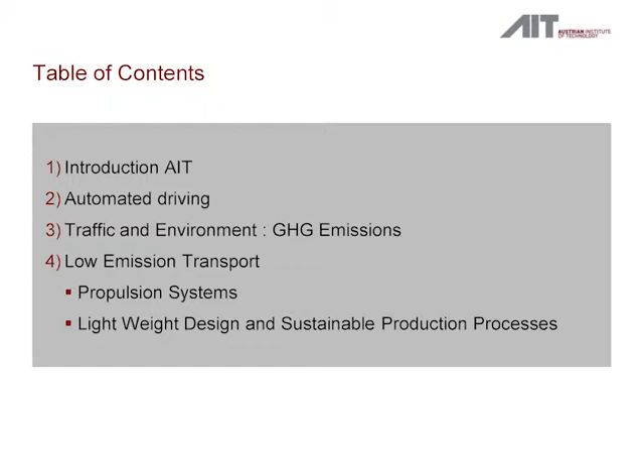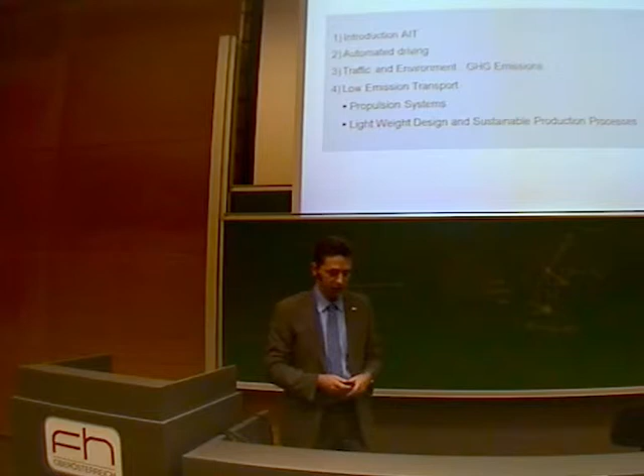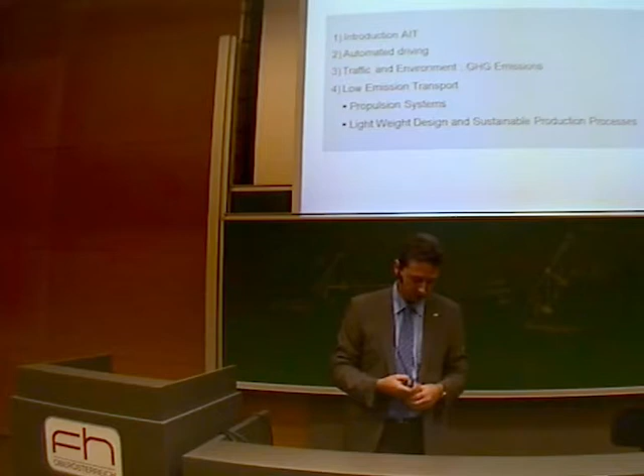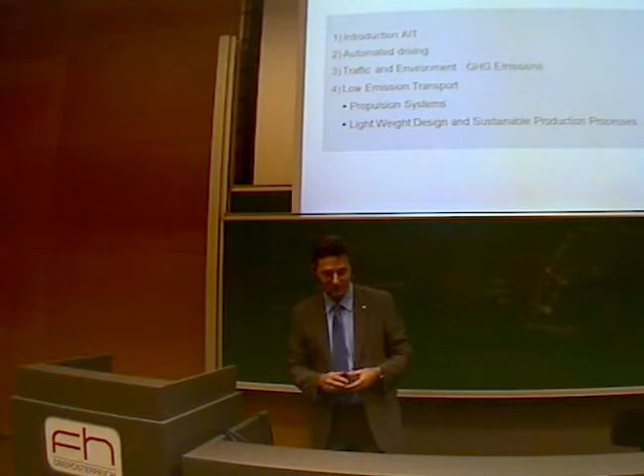A short introduction about myself, so you have an idea why I'm standing here, which was almost given already. Then we will have a short look on autonomous or automated driving, a short look on greenhouse gas emissions, and then on low emission transport systems, especially propulsion systems, lightweight design, and sustainable process and production processes. I hope I can keep this line and make it in time.

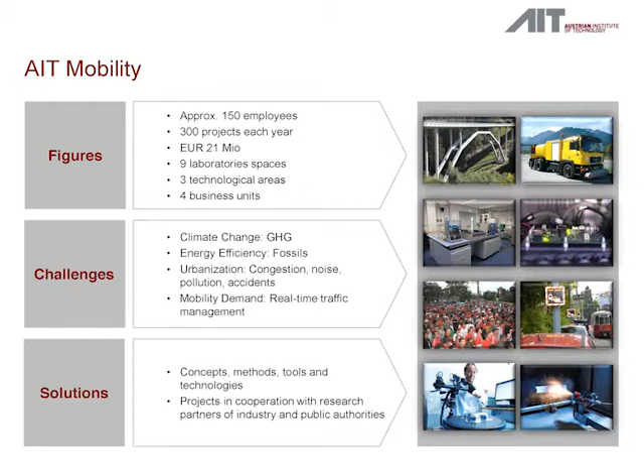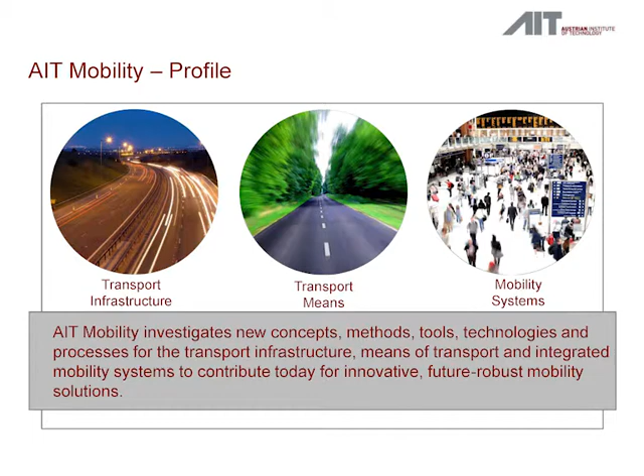Well, I have been introduced already. Austrian Institute of Technology is the biggest non-university research institute of Austria, and on our special agenda we have topics of infrastructure research. We have an energy research department, a mobility research department, health and environment, safety, security, and innovation systems. There is a department of mobility which I'm heading.

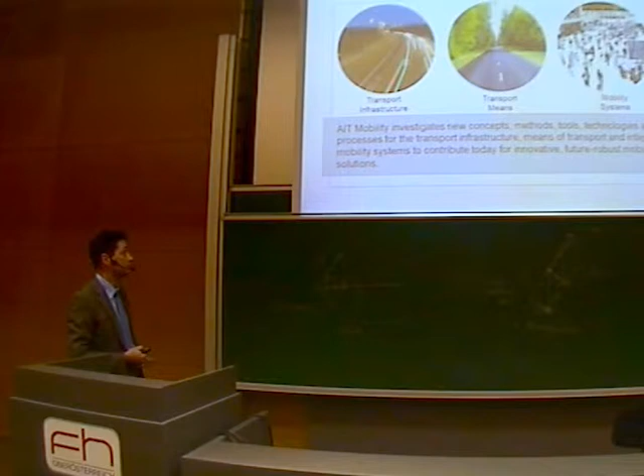If we look at the major research topics actually seen in transport techniques, we have the transportation infrastructure—road, rail infrastructure, bridges, and so on. We consider the innovations and research in the transport means, our vehicles that move us from A to B, and we consider research and innovations on mobility systems, management systems, transport logistics systems, and so on. These are the major topics we are covering in our research.

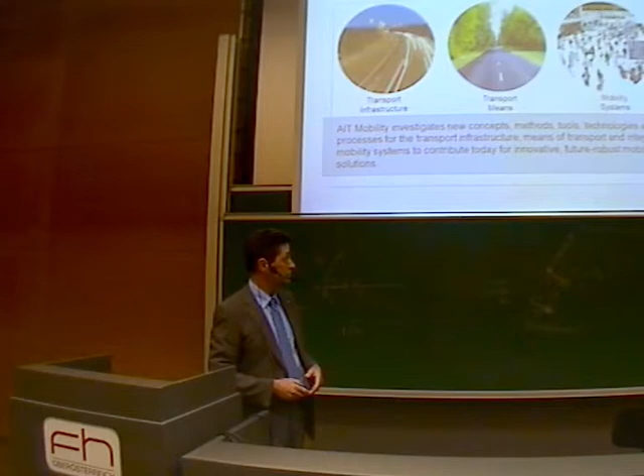To give you an idea, there are these very popular topics which are automated driving, electric cars, and lightweight design, but there's quite a lot more research on transportation, and the major peaks are according to this. These are research peaks. We used here 40,000 publications, looking for the topics in scientific reviewed journals.

On the infrastructure side, you do have emissions, noise emission, gas emissions as a huge peak in the landscape. But already for infrastructure, you have ad hoc networks, so a lot to do with automated driving in future—one of the major issues in research of infrastructure topics.

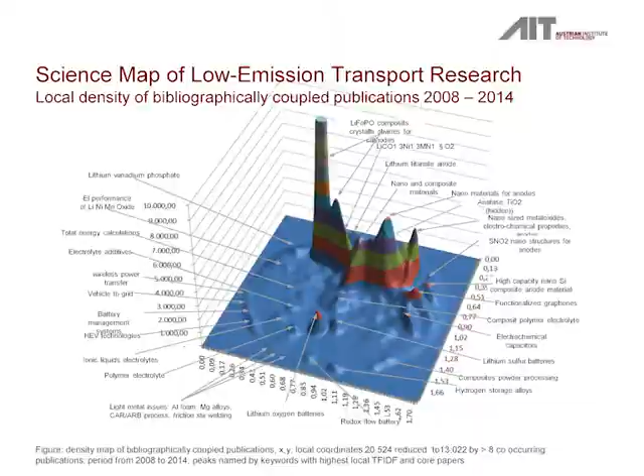If you look at the scientific journals from the point of view of our vehicles, low emission transport vehicles, you have a very strange picture. Again here 20,000 publications covered. What is the topic here? It's electromobility, and it's battery technology, almost only from this plot. You can see different types of batteries where the research is going on.

If you look at something like I mentioned before, a big topic—lightweight materials and lightweight construction—you will find it over there in these areas, very tiny plots against the volume that is published. This was published from 2008 to 2014, in battery techniques and electric vehicle techniques. So from a research point of view, quite a huge amount on electric driving.

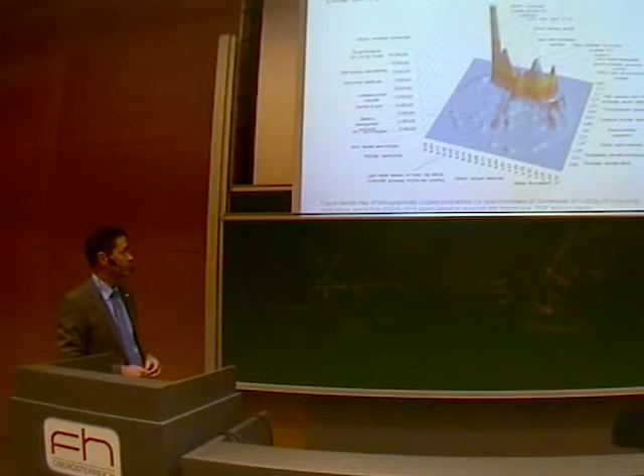Might be that this should be the only slide I should give for automated driving. This is not driving—this is a picture from Austrian Airlines. But if driving could be like this, yeah, I think we all would appreciate. So it will come. It will be.

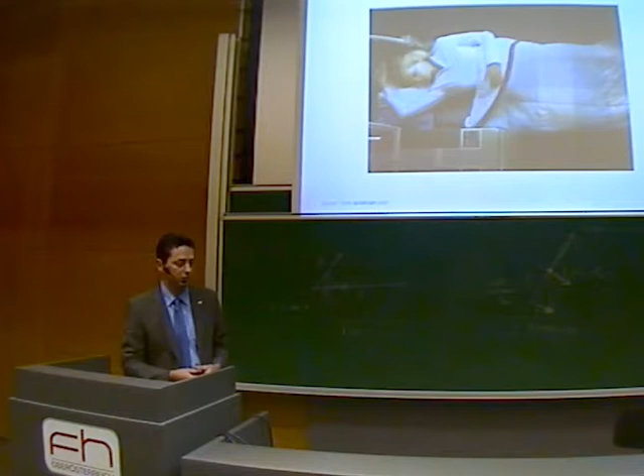Usually I don't like to talk about the future, because you can have a lot of foresight processes to generate scenarios, but none of the scenarios will happen. But automated driving will be reality in future, and it will come. I think the very important point is because it's cool, yeah, to travel like this.

Well, there's a lot of things going on from each and every OEM with respect to automated driving. I think you all might know of several of these things from Mercedes, and of course also from Audi. They're quite good performing there and doing a lot of—

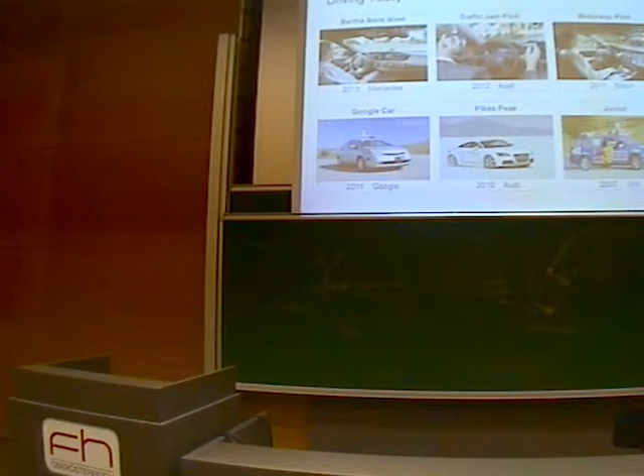let's say, public-related actions, of course, because I don't consider that it will be like this, that we have automated driving at a certain step. It will be an iterative way, and we will not start with the Google car like it is right now, because it also runs only under several circumstances which are usually not that much transported in the newspapers.

But the future will come, and we will have this technology.

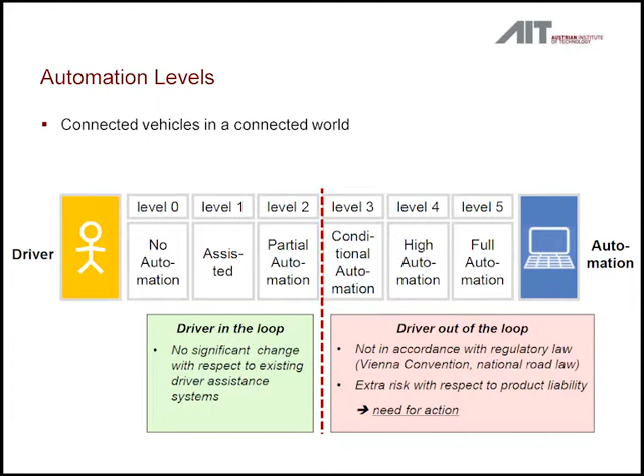Well, where we are, of course, you know that there are several partial automation systems, like parking assistance, lane keeping assistance, and so on, which are already reality. So at this level of automation, we are steadily increasing, and we will have an iterative innovation process.

What is a major barrier now is when we go to what we call level 3 automation. Conditional automation is when we do not need to react to certain things that happen during driving, so the driver is out of the loop. And then we do have a quite big legal issue. There is a law called the Vienna Convention, an international law, that basically says that at each and every time driving a car, we have to know what's going on. And at this step of conditional automation, we do not know this.

I think Audi is already pushing into this border too. You are developing parking assistance where you jump out of the car in front of the building, and wherever your car wants to stop, you are at this point. So it's not only a technical issue getting to these innovations, it's also a huge legal issue.

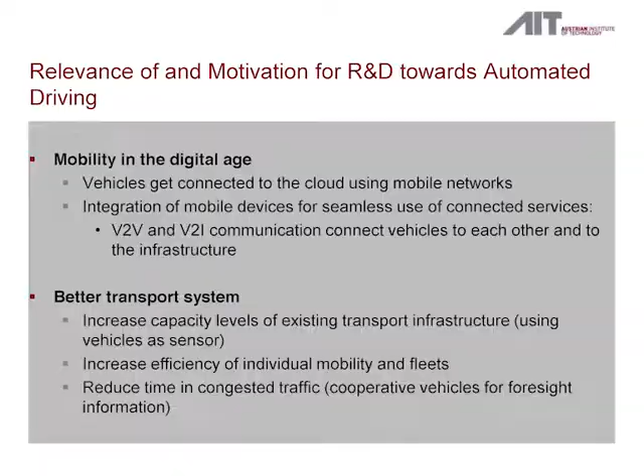Well, skip this. Of course, there are quite important factors for getting to autonomous driving, and the most important factor here is Vision Zero, the safety aspect. Almost all accidents that happen are because of human errors, and this is the most important point, I think, why we have to go to automated driving, and it will happen.

Well, the resources, of course, also when we do have automated driving, we expect that energy consumption and resource consumption will decrease. But from the point of view of industry, how to sell is of course the important item. There will be a huge improvement in comfort. There will be something like a prestige thing again, and we have to think of the market not only in terms of technical benefits, it's also the prestige that is increased.

And of course, well, there are elderly people who might be able to travel by car if we do have automated driving. So this is just a thing to mention. There are a lot of things to do, and these things are going on, and we will have automated driving.

If you check the newspapers, discuss in the research forums, somebody is talking about 2020, others are talking about 2025 for full automation, maybe 2023. So we all don't know when we are really there, but it's in a visible range.

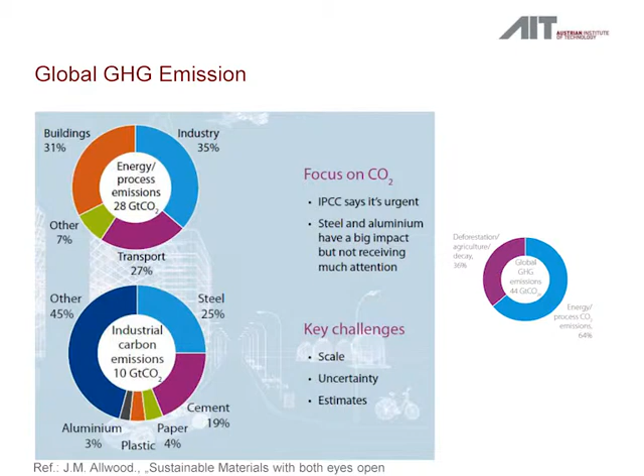Well, but there is a general problem about our transport, and quite a lot of this topic was just covered right now. And there is the thing I would like to mention: we really have to appreciate something like this G-TRON, and research that is going on to make more intelligent use of renewable energies, because the transport sector is quite a huge sector in consuming the energy that we consume in all the world's energy processes.

So in this circle of industry process, transport process, processes like deforestation are not included, not covered here. So we have 27% in transport, and we have quite a huge part in industry. We have the steel industry, and we have the aluminium industry, which again is producing quite a lot for transport. So this 27% is just the moving part, and there is the rucksack you carry in front when you produce your steel, your aluminium, your carbon fiber reinforced plastics.

So I'm just using here one typical presentation of what we expect, and especially what the OEMs expect. We will have a diversification of energy carriers. We had a lot of discussion now on methane and CNG. Of course, biofuels will play a role, and somehow we consider reaching this 80% goal of decarbonization of our energy carriers by 2050.

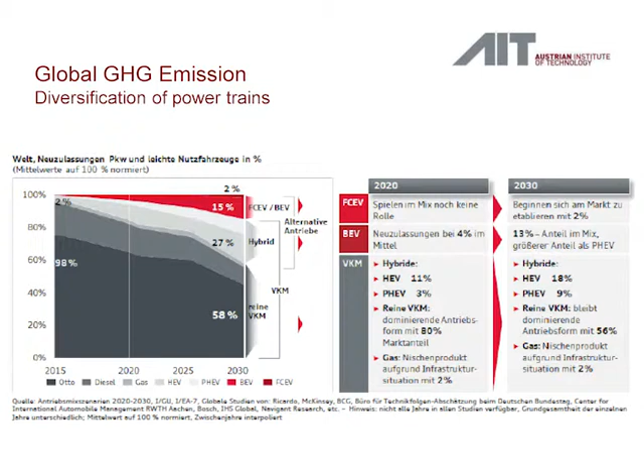With this diversification of energy carriers, we also have diversification of powertrains. This picture is from an Audi presentation given two weeks ago in Vienna. Of course we will have diversification. Even in 2030, the figures don't differ too much across sources - we will still have quite a huge amount of what's not really conventional, but let's call it conventional engines.

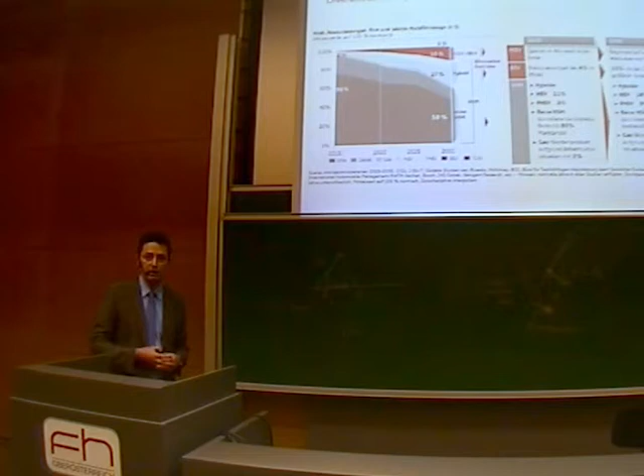Then we will have the hybrids, and we will still see increases in hybrids. I think the reasoning was pretty well given, and we consider this the right way of thinking. Hybrid is a quite good solution, especially for very short distance driving. We also have pure battery electric vehicles and fuel cell vehicles in the future.

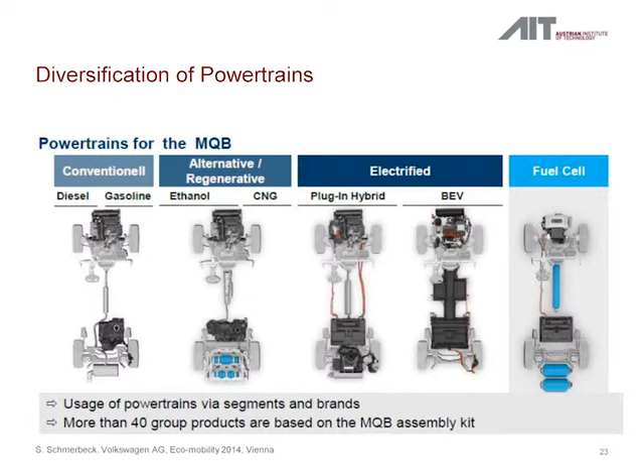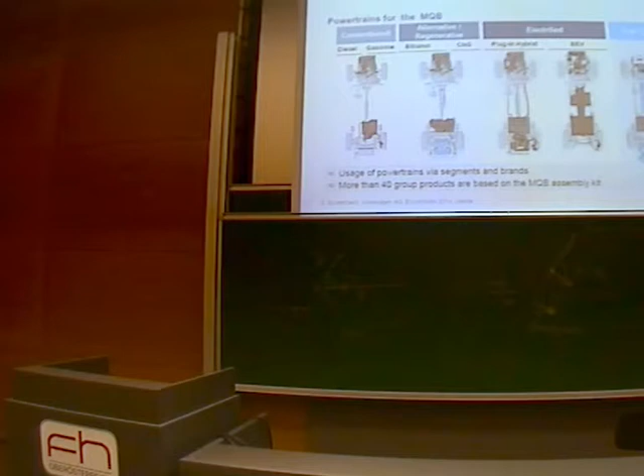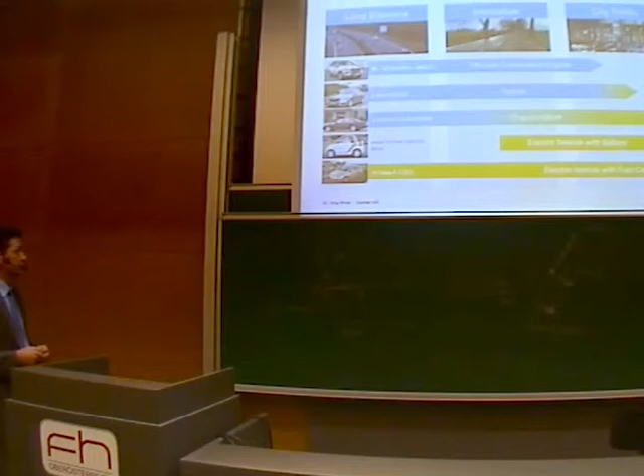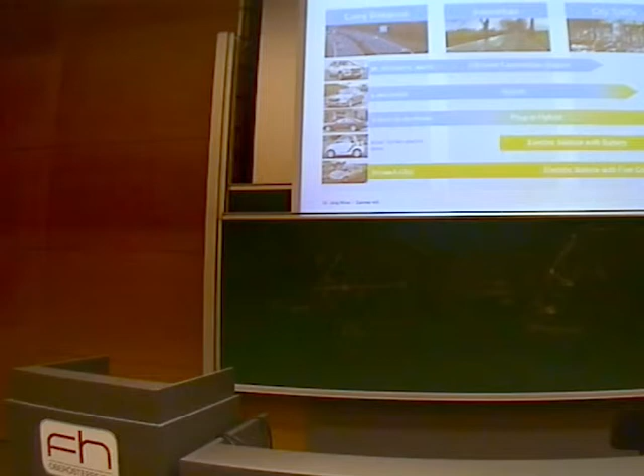The way OEMs are typically moving is toward modularization of their cars - to keep production cheap so they can easily jump from diesel, gasoline to CNG, plug-in hybrids, and fuel cell. This is also true for other providers like Mercedes. This picture shows that electric drives make sense, not only from the energy point of view for short distances, but also from the pollution point of view.

I was in Japan three weeks ago. If you go to the city there, they have quite a lot of electric driving, and the air pollution is really different compared to Europe. They mainly use battery cars and CNG cars, and you really see a big difference for local pollution. This has nothing to do with CO2 or greenhouse gas life cycle assessment, but there is a good reason to have electric cars for short range.

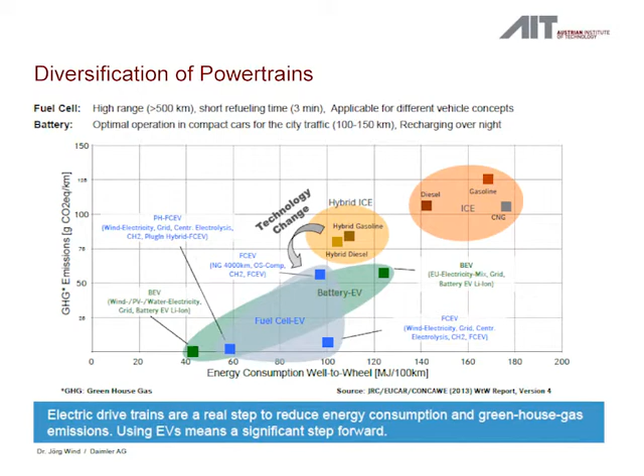For long range, hybrids and electric vehicles should come. I already mentioned energy consumption well-to-wheel - this is not life cycle assessment like we saw before. A life cycle assessment would give a picture that's a little worse, especially for fuel cells and batteries. If you do a life cycle assessment, you'll find that using gasoline and diesel might actually be better than using a battery EV if you use non-renewable electric power.

So there is quite a huge range for the energy consumption of an electric vehicle. You have to have the right and proper energy mix - in Austria we have a pretty good energy mix because we have the benefit of a lot of hydropower.

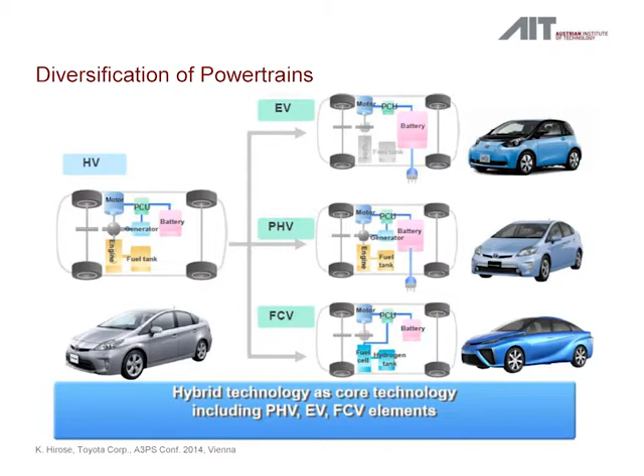Talking about innovation, hybrid cars are already on the market - these are units sold by Toyota, figures given a few weeks ago in a presentation in Vienna, actually around 7 million units. So they're quite ahead here, and it's the same for Toyota playing this modular game to have their cars manufactured in a rather cheap way. They are now coming out, I think in April, with their fuel cell car.

The Mirai will start commercialization in April, and at the end of the year it will also be available in the US and Europe in a small amount. I think they've scheduled 600 cars for this.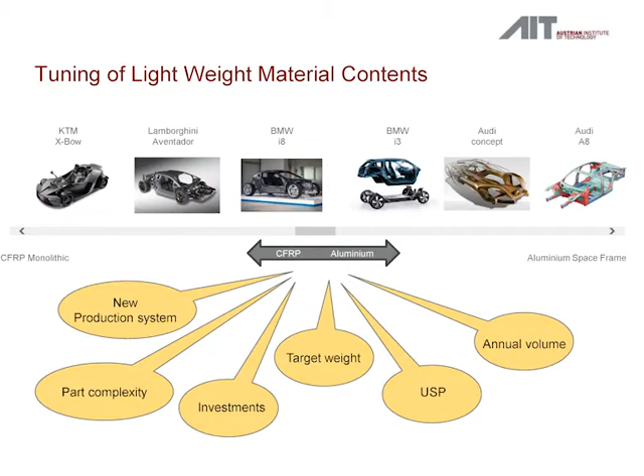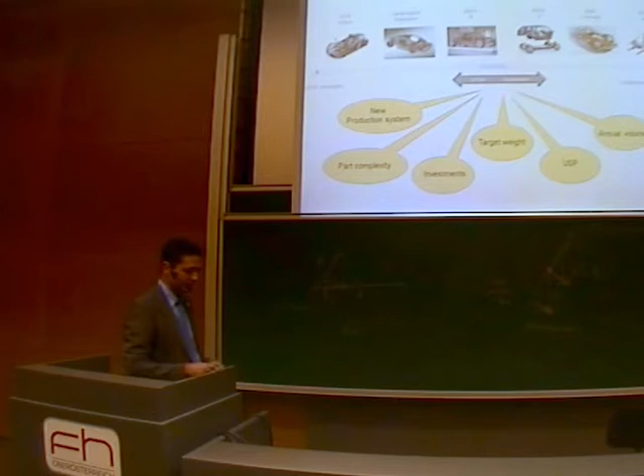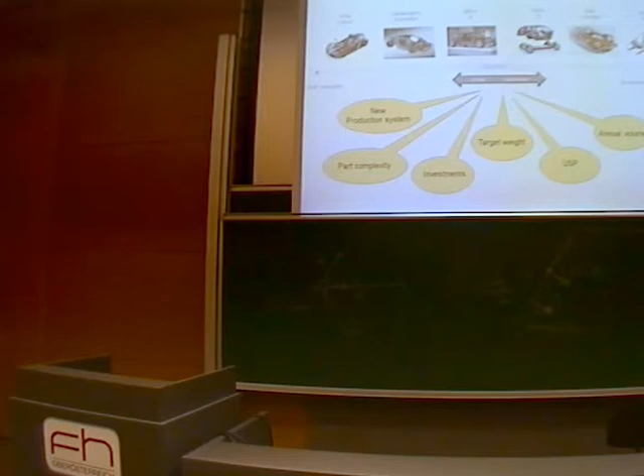So if you look what is available on the market, there are these fancy cars, like the KTM or the BMW, using quite a lot of carbon fiber reinforced plastics, but there are several reasons to switch from the left side to the right side, where we are more or less on the Audi side of designing a lightweight car, a lightweight aluminum space frame. The reasons are pretty much given here, and you can read faster than I can talk about. And of course, there's not only technical aspects, there's the unique selling point. So BMW would not go on the market with the same arguments as Audi.

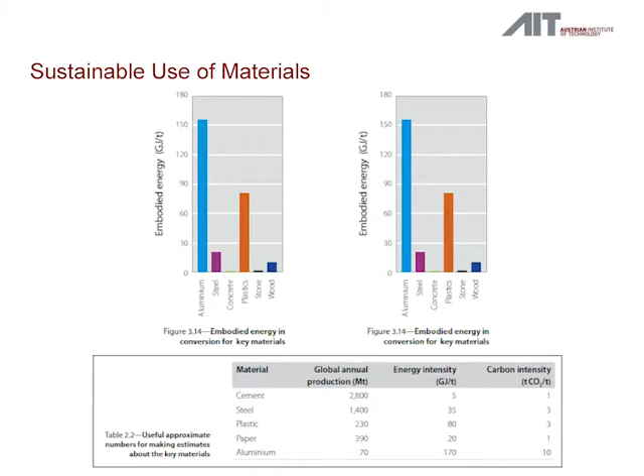Okay, so at the very end, I would highlight once again our consumption of materials. Here I show a plot of embodied energy until you get to the material you want to produce your transport vehicles of. And you see aluminium has quite a huge amount of embodied energy compared to steel. Well, this is the reason why you still have to consider, is lightweight design always the right thing? How much is this energy worth to utilize steel and aluminium in constructing our vehicles compared to steel and plastics?

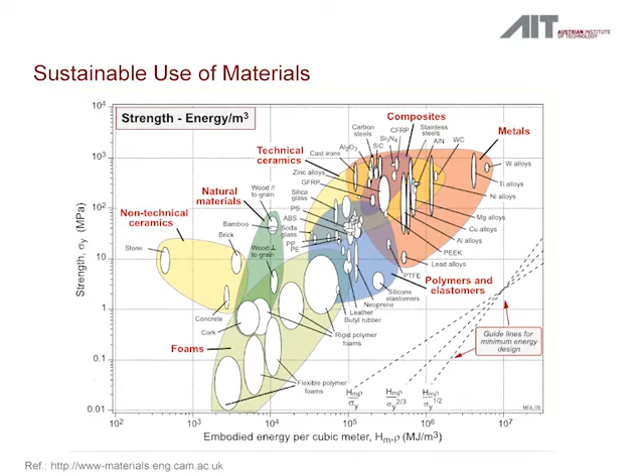Well, here now a little bit more complex map, where we have energy per cubic meter, so the volume, the size of the car is pretty much dependent on our size. So it's worth looking not only at the kilogram, but also at the energy per cubic meter. Here you see carbon fiber reinforced plastics, stainless steel, magnesium alloys, which are definitely a candidate for future lightweight alloying, and aluminum alloys are also given here, and they get closer together. But still, we have quite a good position of steel in this diagram.

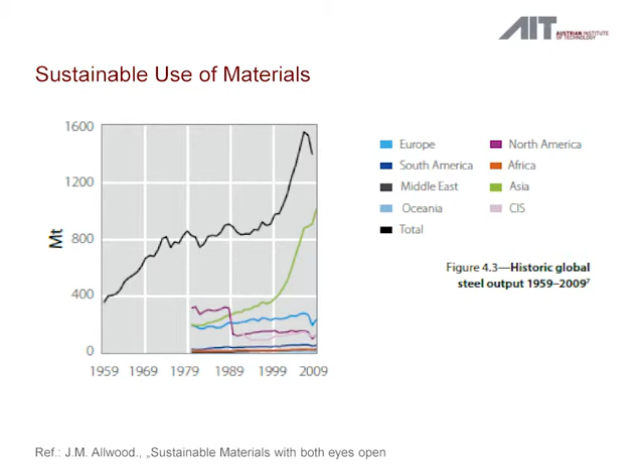Well, and why is our discussion of all these energy topics that important? Here a plot of the historic steel output until 2009, so it's increasing pretty fast, especially in the developing countries. Here the green line for Asia, and we do have quite a stable situation in US and Europe.

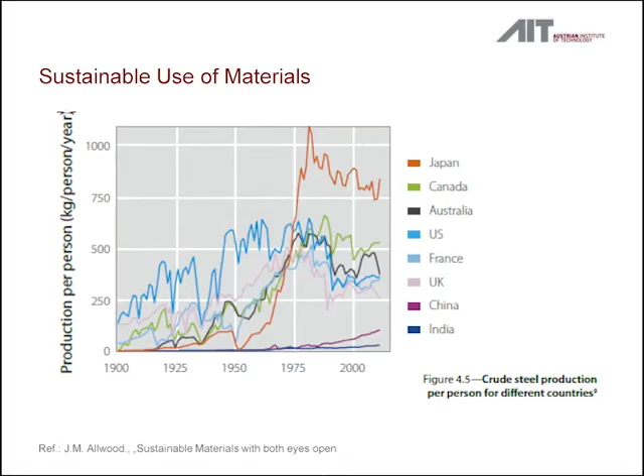But if you look at what kind of material consumption we have per person, we see that in our fully developed countries, we have quite a settled amount of material we utilize per person. Japan is pretty much different, on a much higher level, but this is not transport related, this is building related. They have to build earthquake safe buildings, and this is why the peak for the Japanese is much higher. But in the developed countries, we have quite a stable situation, while China and India are still at a very low level.

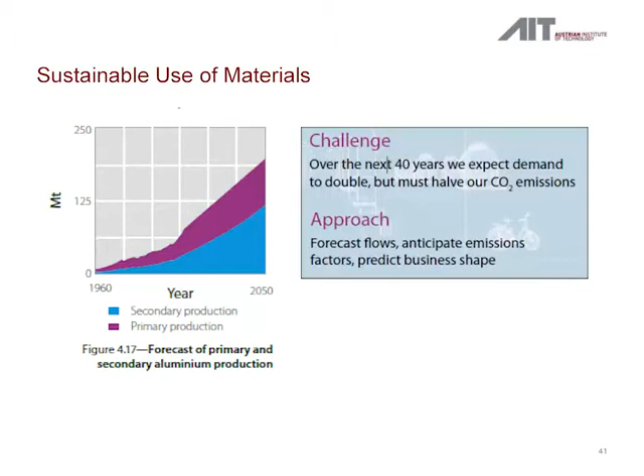So from this, you have a prediction of what might be the future for steel consumption. Steel industry doesn't have to fear too much, there will still be in total a huge increase, and aluminium will also see a huge increase. This is why AMAG in Austria is investing quite a lot in their production system, and also voestalpine in Linz is investing quite a lot, because it's visible that consumption will be much more.

And this is a rather critical outlook for the next 40 years. We will double our energy consumption and our material consumption, but have to cut off half the CO2 emissions. This is quite a process, and one of these research parts that has just been demonstrated with the GTRON project is a very important countermeasure to this development.

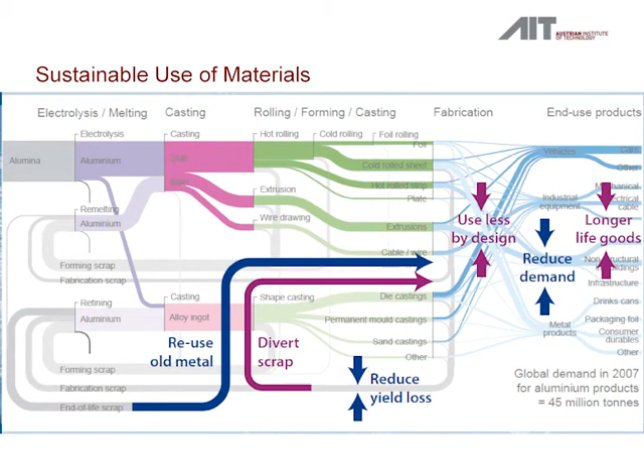And this is the one slide which looks quite complete, which I like to use to close this session. Well, industry has to work quite a lot on how this material is produced and reduce this energy consumption. And we have to work a lot on reusing material, reusing scrap material, reusing yield. But there is also the design issue: use less by design, so optimize our design, and a rather more social thing - not only industry can deal with this problem, we also need to reduce demand and try to have longer life in our goods.

Well, we are a research institute, not only industry driven, so otherwise I would not mention the last two items, but with this I want to close.